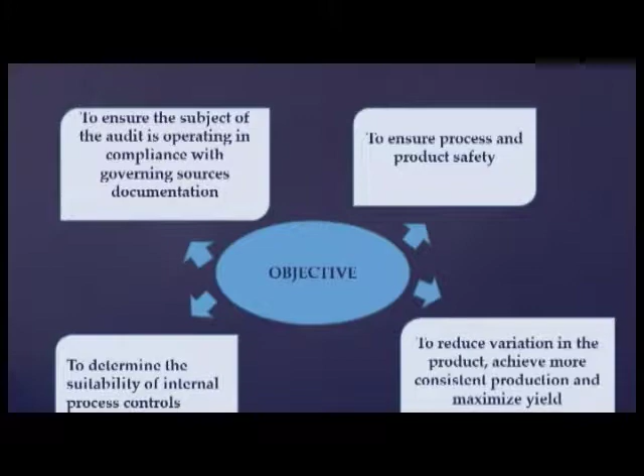The objective and scope of manufacturing product quality audit. The first one is to ensure the subject of the audit is operating in compliance with governing sources documentation. The second one is to ensure process and product safety. Next is to determine the suitability of internal process controls and to reduce the variations in the product, achieve more consistent productions and maximize yield.

And the scope is the outgoing product meets a predetermined standard level of quality for a product line. Examine a process used to produce the particular product or the system supporting the product to be produced.

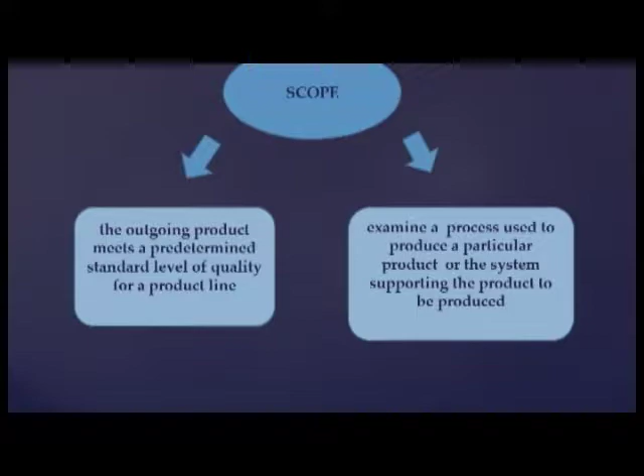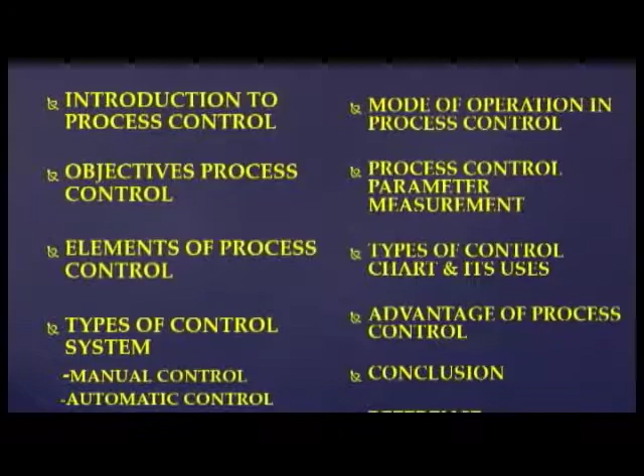The outline of the video presentation. The first one is introduction to the process control, the objective of process control, the elements of process control, the types of control system, which is manual control and automatic control. Next one is the mode of operations in process control, parameter measurements, types of control chart and its uses, advantage of process control, the conclusion and the reference.

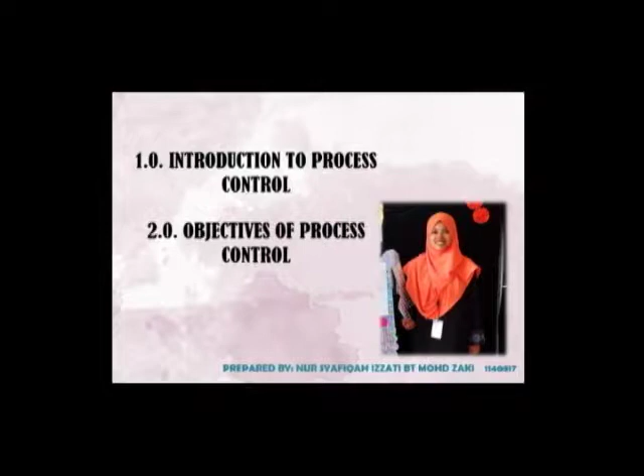First, I will introduce you to the process control and its objectives in food processing. So, what is the meaning behind the words of process control? First, we look at the process. What is process? Process is defined as any combination of machines, tools, methods, materials, and men employed to attain the qualities desired for goods and service. Then, what is control? Control is the managerial process of establishing and meeting the standards. Combining this word, we have process control.

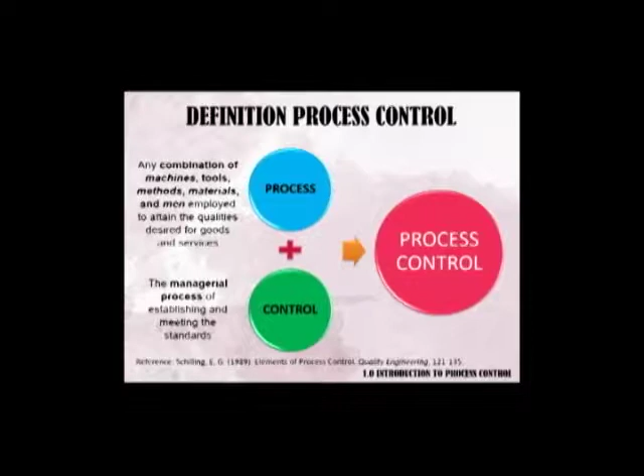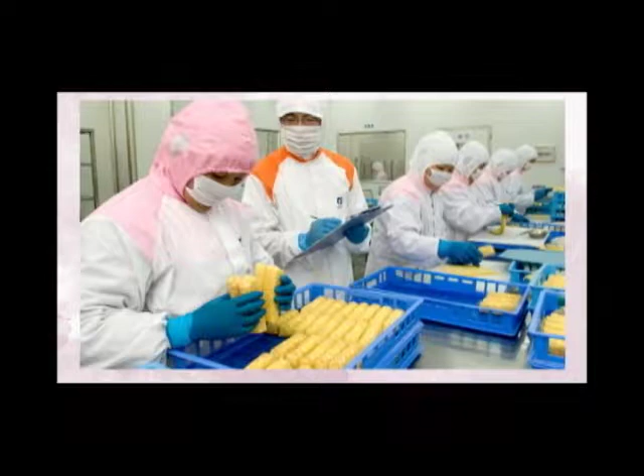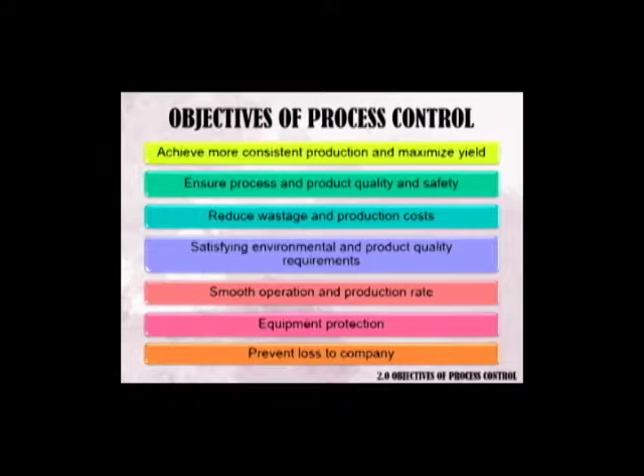So, why is process control important in food industry? It is to maintain process at desired condition and to reduce the variability in final products. By doing that, we can meet the legislative requirements and consumers' expectation of product quality and safety. These are some pictures of how process control activity is implemented in food industry. And here are some of the objectives of process control.

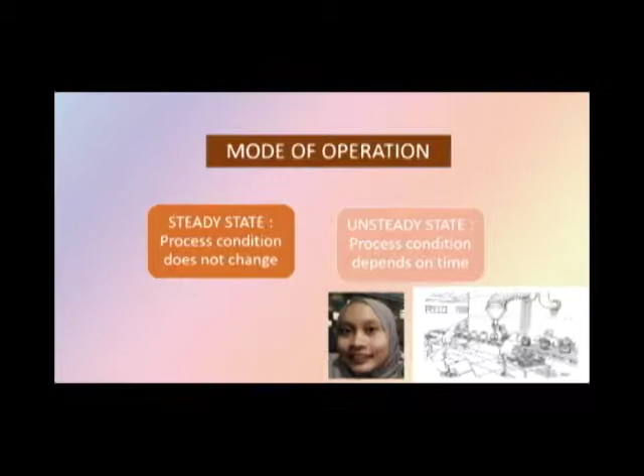For mode of the operation, the processes are operated under two states: the first one is steady state and the second one is unsteady state conditions. For steady state, the process conditions do not change, but for unsteady state conditions, the process conditions depend on the time. The latter occurs in most real situations and requires control action in order to keep the product within the specifications.

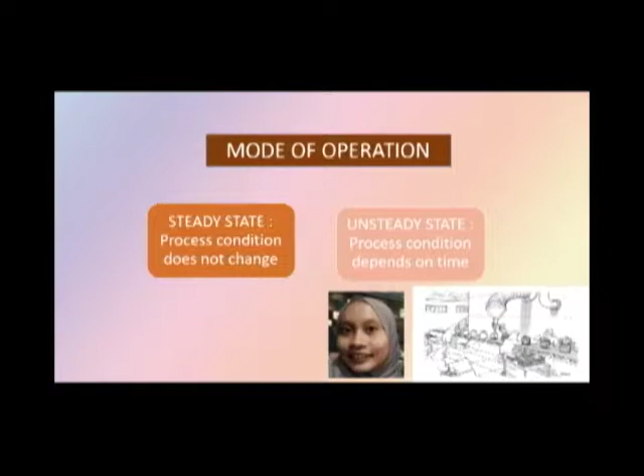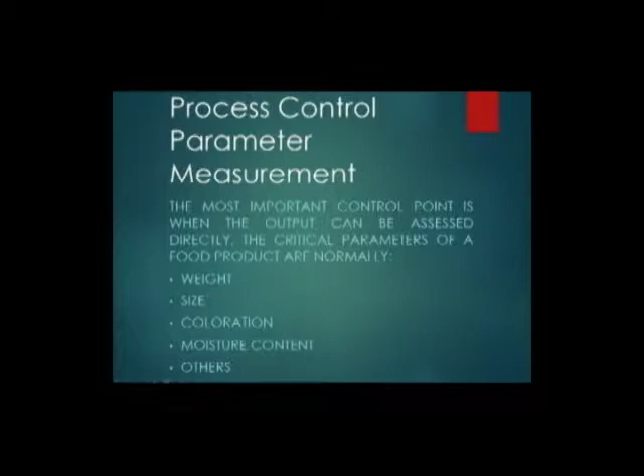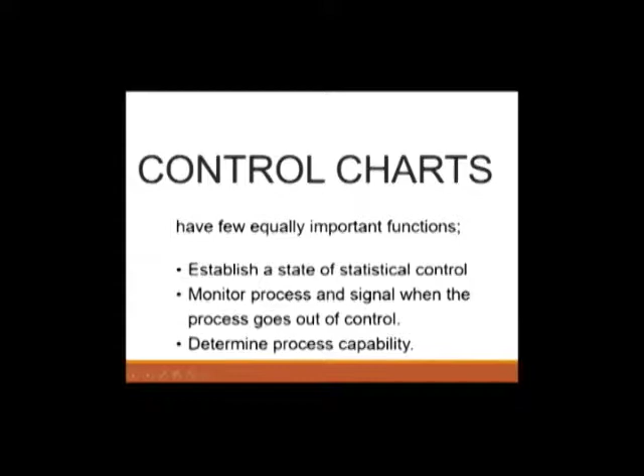So moving on to the control charts. So basically in statistical process control, there are 7 basic quality control tools, and one of them is control charts itself. So here it is stated that control charts have few equally important functions. The first one would be to establish a state of statistical control, to monitor process and signal when the process goes out of control, especially in order to take corrective action. And the third one would be to determine process capability. There are several types of control charts, but the most commonly used are the variable and attributes control chart.

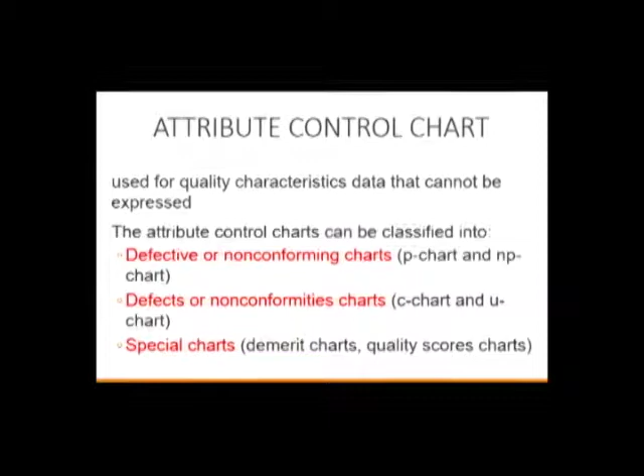Variable control chart, which is also known as Shewhart's control chart, is the most used SPC tool in any quality assurance program. And this chart is used for important variables or continuous quality data, or in simpler terms, data that can be measured, such as weight, control volumes, yield, chemical, nutritional, and microbiological characteristics. And this chart is normally based on normal distribution under the assumption that the statistic plotted on the chart is normally distributed.

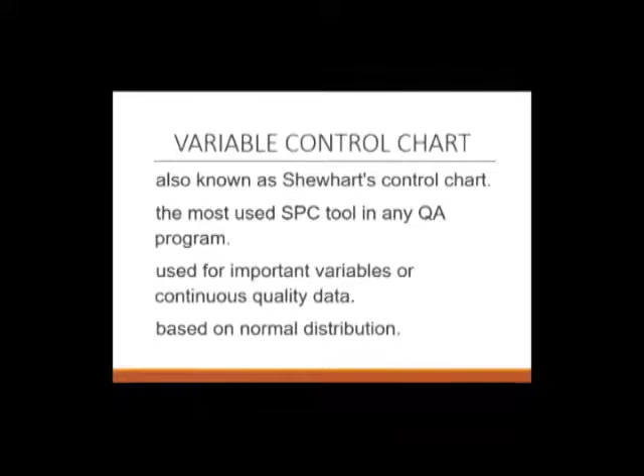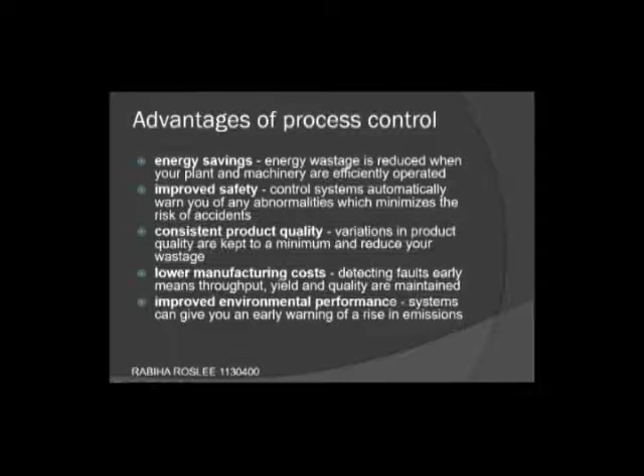Advantage of process control. There are 5 advantages of process control. Firstly, energy savings. Energy wastage is reduced when your plant and machinery are efficiently operated. Secondly, improved safety. Control systems automatically warn you of any abnormalities which minimize the risk of accidents. Thirdly, consistent product quality. Variations in product quality are kept to a minimum and reduce your wastage.

Fourthly, lower manufacturing costs. Detecting faults early means throughputs, yield, and quality are maintained. Lastly, improved environmental performance. The system can give you an early warning of a rise in emissions.

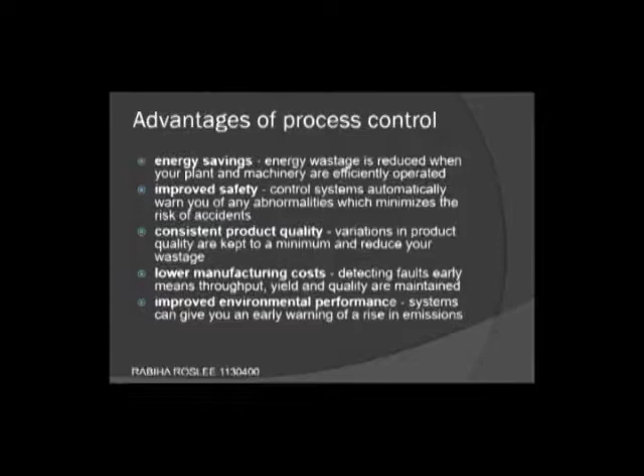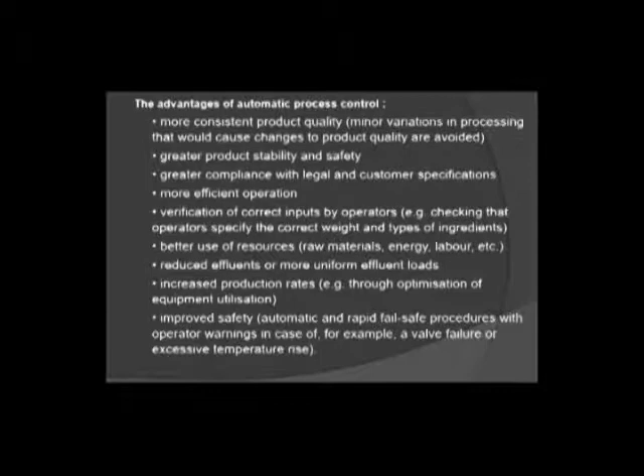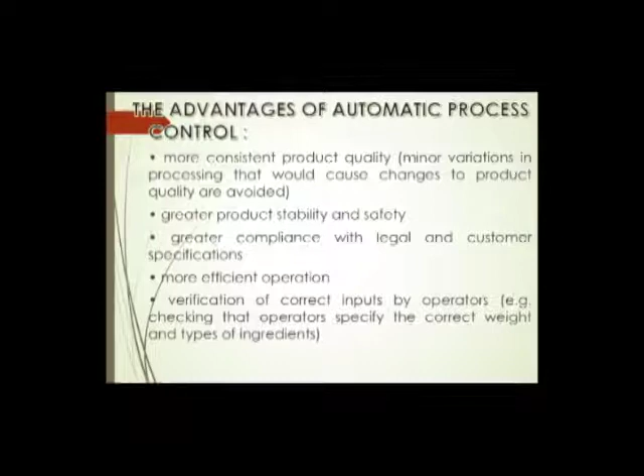These are the advantages of automatic process control. Firstly, more consistent product quality, which means minor variations in processing that would cause changes to product quality are avoided. Next, greater product stability and safety. Next, greater compliance with legal and customer specification. Next, more efficient operation. And next, verification of correct inputs by operator, for example checking that operator specify the correct weight and type of ingredient.

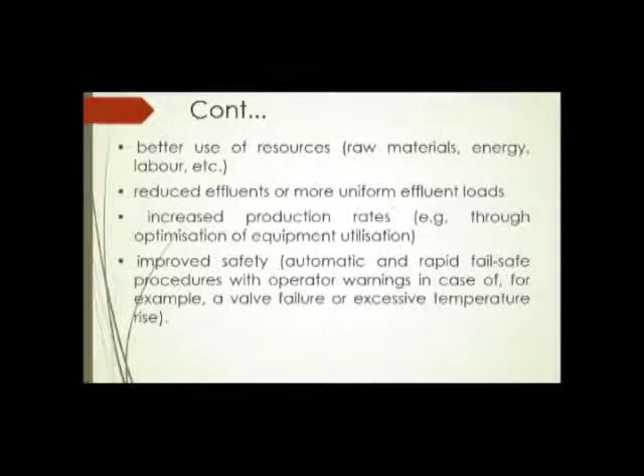Next, better use of resources, which are raw materials, energy, labor, and etc. Reduced effluents or more uniform effluent loads. Increased production rates such as through optimization of equipment utilization. And lastly, improved safety, which are automatic and rapid fail-safe procedures with operator warnings in case of, for example, a valve failure or excessive temperature rise.

As for the conclusion, a well-designed process ought to be easy to control. More importantly, it is best to consider the controllability of a process at the very outset rather than attempt to design a control system after the process plan has been developed. It has been used to maintain process at desired conditions and reduce the variability in final products. It is also used to meet legislative requirements and consumers' expectation of product quality and safety.

Compliance, traceability, consistency, and reliability of measurement data in process control systems are primary concerns for the food processing industry. The control system in place needs to verify the product quality through measuring, counting, inspection and testing of the manufacturing process. Operator input data, scanning systems and feedback systems are used.